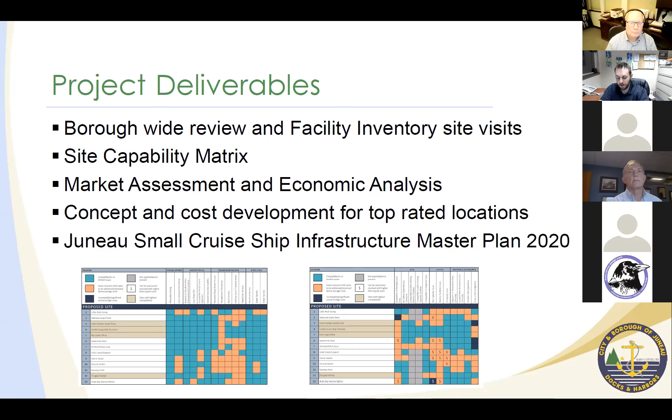Thanks, Eric, and nice to see everyone. Sorry I can't be there in person.

I'll start with a few notes about McDowell Group. Most of you are probably familiar with us. We've been around almost 50 years, and almost all that time have been tracking, analyzing, and measuring the economic impacts of the visitor industry in Alaska. We are based mostly in Juneau and Anchorage. I'm calling in from Bellingham, but I still will always consider myself a Juneau resident. I lived there about 12 years, so I was really excited to work on this project. It was a fun one.

As Eric mentioned, we conducted our analysis in the winter of 2019-20, before COVID was just a twinkle in our eye when we were wrapping this up. So I'll add a few post-COVID notes to this, but the report really reflects the pre-COVID environment.

The sources for our study, and some of them are on the call with me today, so thanks to all of you who helped me out. We talked to a lot of cruise line representatives. We maintain a cruise passenger traffic database for years, so we were in a really good position to tackle this project because we always track who's coming and going, what lines are coming and going, how their itineraries are changing, and how passengers are changing over time. Port of Juneau also gave us traffic data for their intermediate vessel float and input on traffic levels. And we also maintain a pretty good database of how passengers are spending their money and where, and cruise lines provided us some information on their spending in Juneau. So that was our methodology.

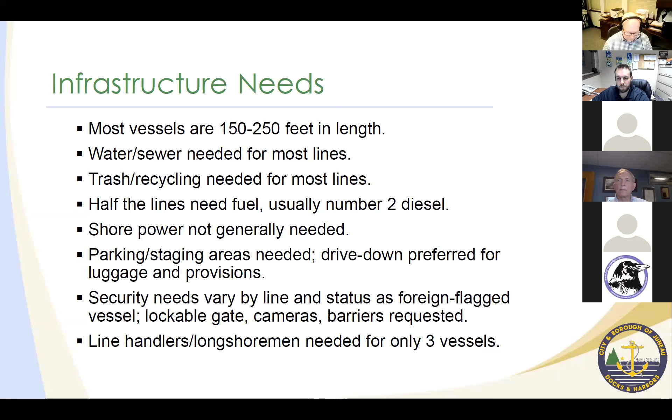We also asked CBJ their perspective on what was needed and where they were getting squeezed. They did an analysis of the IVF, the intermediate vessel float reservation data. In 2018, they noted 60 days at or over capacity. In 2019, 51 days at or over capacity, which is a big chunk of the summer. They noted that in July and August they turned vessels away 5 days a week, and in June and September, once or twice a week. That's a lot of vessels turning away—yachts, fishing vessels, all kinds of vessels—and it gets very congested down there. They recommended a 350-foot float with berths on both sides, so 700 feet of available moorage space. I know Dick is going to go more into that as we go forward.

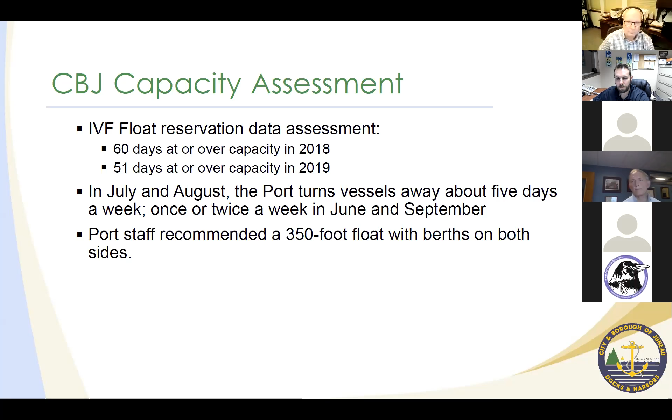So my final slide is about what do these lines bring Juneau? We estimated that they bring about $13 million between passengers, crew members, and cruise lines.

We were careful—we actually did some surveys out of the Juneau Airport a couple of years ago for Travel Juneau, where we caught cruise passengers exiting Juneau via the airport. We were able to ask them how long did you stay, how much did you spend, what did you spend on, all that sort of thing. We're always very careful not to double count spending. So if they said the cruise lines sometimes spend on hotel on the passengers' behalf, we always are careful not to double count those numbers.

You can see that those on turnaround, embarking or disembarking passengers, are spending a lot more—$575 per person on average, according to our survey research. Day passengers, we assume are spending about the same amount as the large cruise ship passengers, so about $160. We applied different rates depending on whether passengers were staying for the day, staying overnight, or embarking or disembarking. Crew members—we've done crew member surveys in the past—over the course of a summer they spend money on dining, transportation, shopping, and things like that.

The cruise lines also spend quite a bit of money locally. They purchase fuel, get their linens laundered, charter vans to get passengers to the airport, hotel rooms, dockage fees. Overall, passengers, crew, and cruise lines are estimated to spend about $13 million—at least in 2019, that was the figure we came up with. Just important to keep in mind, although small cruise passengers represent a fairly small, about 2% of the overall volume Juneau gets, they do spend extra time and extra dollars in our economy. That's it for me.

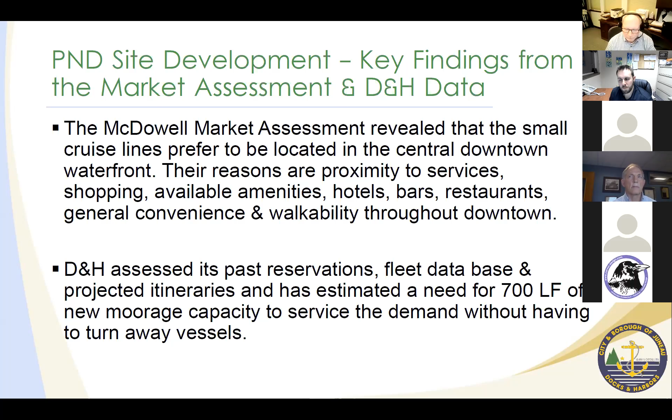So these are key findings, and I'll be referring to them as we move forward. So let's go on to the next slide.

Our team really assessed sites throughout the borough, and really these 6 sites kind of rose to the top for further, possible development within the community. Not all of them are located downtown, as Heather indicated. Auke Bay really wasn't in the running in terms of what the industry had desired, but we thought we would take a look at that. You will see some slides on that, but we also looked at the Little Rock dump.

We looked at Douglas Harbor. We looked at Harris Harbor. We worked with Norwegian Cruise Lines in their development of the subport a little bit, and we have a potential option for that as well. We won't be focusing too much on their project tonight because they have a presentation for the community next week, but we're going to take a look at that here as well.

But then lastly, we looked at the NOAA and the Seadrome site, and that has emerged as the Docks and Harbors preferred site for future development for this facility. So now I'd like to walk through on these next slides, really some of the concept plans that we've looked at for each of these sites. And the first one is Auke Bay.

This is a concept that was actually developed several years ago, 3 or 4 years ago, when GSA was trying to disperse the federal property after the NOAA facility was no longer needed, and those operations had long moved out to Lena Point. So both CBJ and the university received some property when that property was dispersed. As part of that process, each of those new landowners had to develop a plan that showed how they would put this into public use. So this Auke Bay Marine Station plan is what we're going to talk about here real briefly.

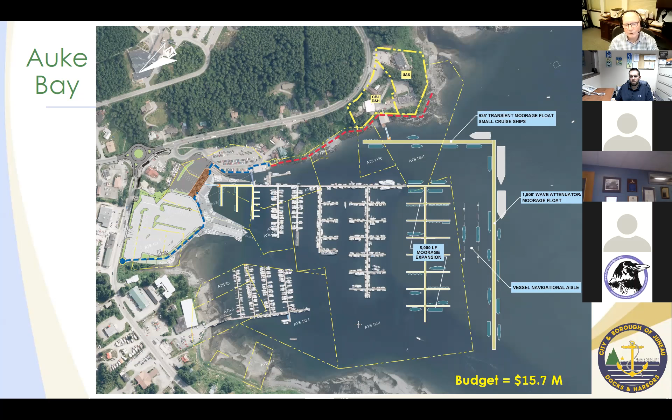Let's go on to the next one. This is where we looked at several downtown vicinity sites. This is just an overview of the downtown harbor area. We're going to look at 5 sites here.

The Little Rock dump towards the south is one site. Across the channel to the entrance of Douglas Harbor is another site we'll look at. And then far to the north, all the way under the bridge, is Harris Harbor. We've got a little project there.

And then coming in towards the subport, this is the NCL proposal here, a preliminary proposal at this stage. We'll be looking at options there. And then the preferred site is at the other end of the subport. The NOAA and the Seadrome site are right there. So that just gives you kind of a vicinity, along with what all the other cruise ship facilities look like in town. So let's move to the next site.

This is a concept that we developed for the Little Rock dump. The Little Rock dump itself has got quite a history. It was once a landfill. After that, it was a sludge disposal dump from the wastewater treatment plant. That's what all those areas look like, little golf courses, but they're actually sludge pits. That was capped many years ago, maybe 20 years ago, and closed out as a landfill. But the point being is that that whole Little Rock dump is pretty high in elevation, 55 to 60 feet above the water, which makes it very difficult to have the grades work out down to the water.

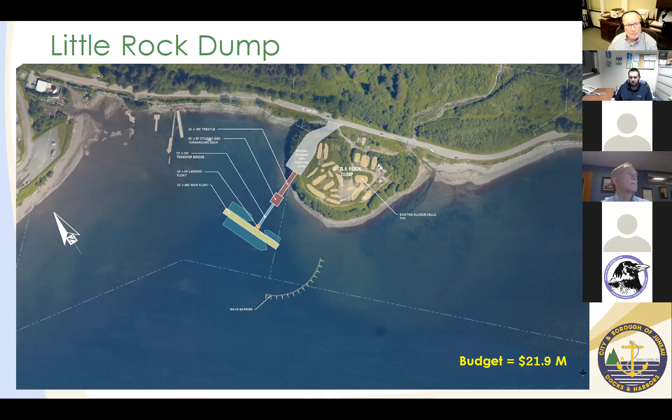Here's an option that we looked at at Douglas Harbor. Right at the entrance to the harbor, there's a floating wave attenuator that was installed by the Corps of Engineers a number of years ago, along with a couple of rubble mound breakwaters that protect the entrance to the harbor. This concept would look at extending that float to the north with a new float, roughly 20 feet by 250 feet. The existing wave attenuator is 230 feet, so you have an overall length of about 480 feet on the outer berth, and there's enough room on the inside to get another 100-foot vessel on the north inside berth.

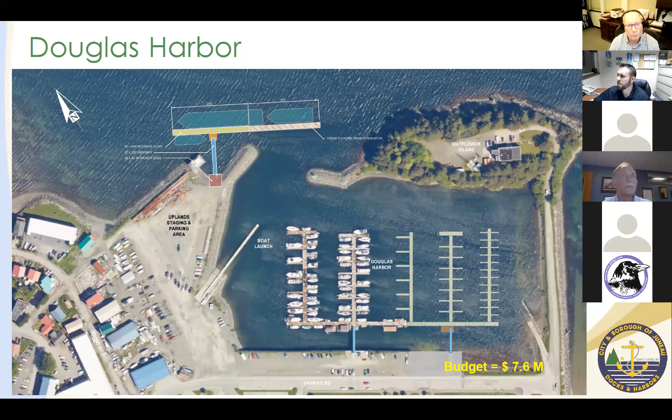So it doesn't quite get to 700 feet, but the facility would be just a small pile-supported pad or deck at the edge of the fill there, leading again to a drivable gangway down onto the float. One of the problems with this is it's a heavily utilized area for launching boats and whatnot, with trailer parking, so this would cut into the uplands development for any sort of upland expansion. But this is a lower cost option, budgeted at 7.6 million total project cost. So let's move to the next one.

Harris Harbor. You can see the bridge, and just inside the entrance to the harbor, there's a roadway that runs under the bridge there. It's a very narrow traveled way. We looked at what we could do to increase the uplands in this vicinity, and also increase moorage capacity.

This is showing a sheet pile bulkhead, roughly 565 feet long right in there. That would be filled and create about an acre of new uplands. It's roughly 60-foot average width off the existing roadway, about 40 feet on one end and 80 on the other.

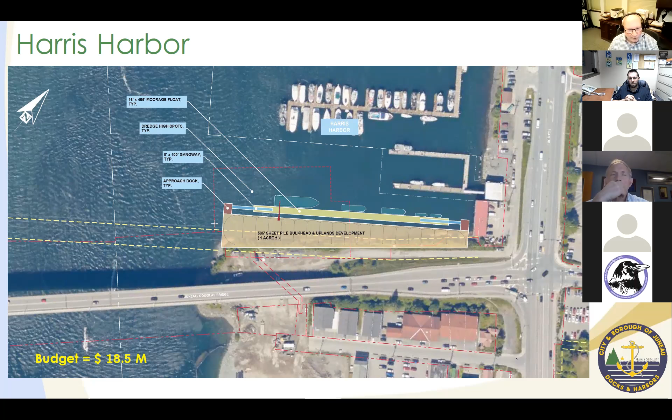In front of that, we'd have to dredge the basin to get water depths deep enough for these vessels, so there's a dredging component to this. At both ends of the bulkhead, there'd be a pile-supported platform with a gangway leading onto a new moorage float. That float is only 465 feet in length, but it has quite a bit of capacity.

This has some genuine interest with Docks and Harbors. But there's a fatal flaw with this concept in that the larger ships can't get under the bridge. A few in the smaller class could use this, but it won't service the bulk of this fleet getting in and out. So it has potential, but only for the smaller vessels, and it's budgeted at 18.5 million estimated for this concept.

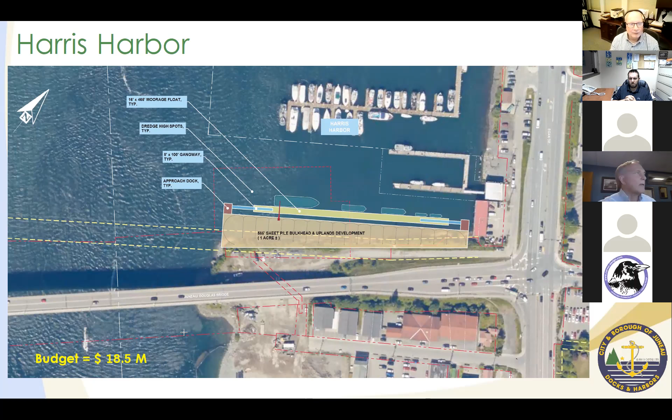Let's move on to the next concept. This is the Norwegian Cruise Lines and U.S. Coast Guard subport plan. This is very preliminary in nature, obviously.

As I mentioned, NCL is working with MRV and PND as part of that team. Captain Ed Page and a bunch of other consultants are helping NCL develop their subport property. They'll be in front of the public again next week to talk about this.

I was asked by Docks and Harbors to look at this, just to see if there's any possibility we could service the small cruise ship fleet at what's being proposed here by NCL. I'm only going to speak to the offshore portion of this overall plan: a new pier would be extended basically in line with Whittier Street, straight offshore.

There'd be a pile-supported deck right in there that leads to a drive-down transfer bridge landing onto a central pontoon, not unlike the 16B berths. This would be a floating berth as well, and offshore from that are mooring dolphins.

NCL only proposes to use one side of this berth for their ships, leaving the other side for other operations, because this berth would interrupt the Coast Guard operations. You can see remnants of the Coast Guard deck off to the left, basically at the bow of the NCL ship there. So this would interrupt Coast Guard vessel operations, and NCL has agreed to have Coast Guard vessels raft up on the inside berth of the floating pontoon.

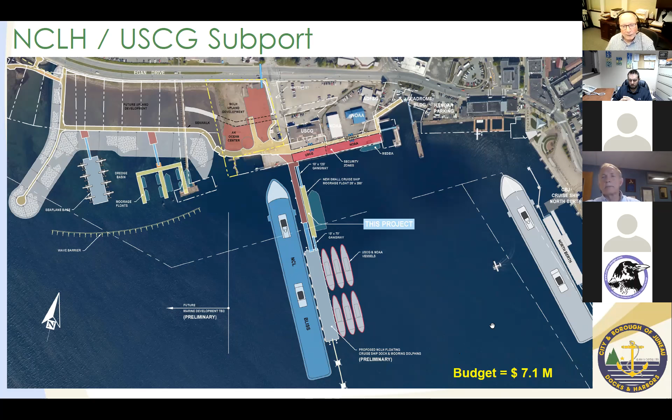Let's move on to the next idea. This is what has emerged as the preferred plan thus far. We're calling it the NOAA Seadrome concept.

If you consider what I just discussed for the NCL facility and left that plan in place, this facility moves a little to the east and is focused on NOAA property, Goldbelt property, and CBJ property. So it would be an endeavor requiring quite a bit of cooperation and coordination between all those entities to work.

In essence, what it does is expand the uplands — you can see it in the enlarged parking area. I'll show another view of that shortly, but basically it advances both fill and a pile-supported deck offshore. By doing that, you'd have to slide the existing Seadrome float seaward as well, connecting into a new deck right there — that's the existing gangway and float.

And then to the west of that would be the new small cruise ship float. This is a 32 by 350 foot float, accessed by a drivable transfer bridge off the deck, so vehicles could come through the parking area, drive right on down, turn around, and come back up. There's also an option here for NOAA, which occasionally comes in and would like a floating berth. Through scheduling with docks and harbors, they'd be served there as well. When they needed heavy load operations off their upland facility, they'd move to the pile supported deck and load from there—you can see some ship maneuvers up off that float.

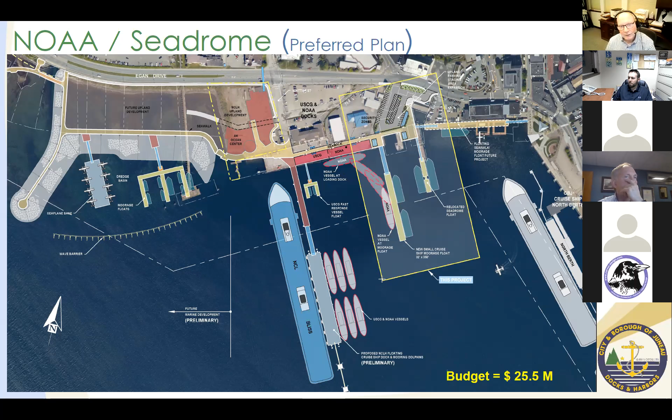If we could move to the next slide, we're going to toggle back and forth a little bit. This is what the existing conditions look like right now. There's a variety of different parcels held by different property owners, and there would be a lot of coordination that would have to happen for this to work. We've been in discussions with NOAA and Goldbelt, and both are looking favorably at this as a possibility, but quite a bit of work would need to happen before that could take place.

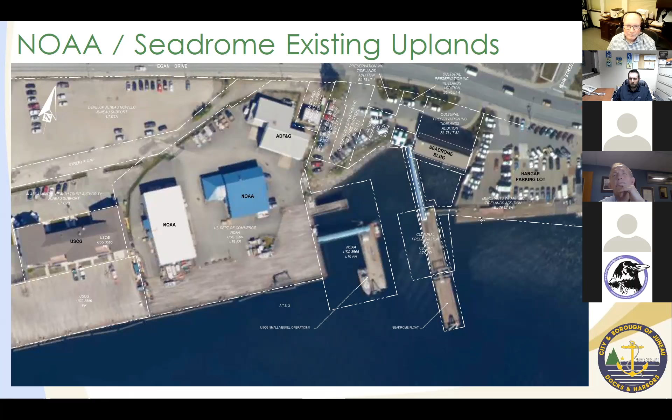So if we go to the next slide, this is the uplands developed. Let's toggle back real quick—here's existing, and now moving forward, here's what's proposed. You can basically see a fairly significant uplands expansion. It would not be unlike what's occurred over the past year or so for the deck-over project next to the parking lot, where fill was placed behind a retaining wall and then there was some seaward pile supported deck. This would be somewhat similar in nature to that.

You'd end up with 39 passenger vehicle parking stalls in the uplands, and 8 bus parking stalls with a canopy for patrons getting off the buses and whatnot. At the top of both gangways would be covered shelters for people getting out of the weather. There's also a space near a revised entryway where larger coaches in front of the Seadrome could come in and park, along with a covered shelter there. So there's a lot of upland circulation improvements here, both for pedestrians and for vehicles.

And then in this slide, you can also see where the small cruise ship moorage float is extended right there.

So this project had a budget of $25.5 million overall. But it has a lot of community opportunity here, with the Seawalk being able to extend in both directions—back towards the subport and in front of NOAA and Coast Guard, as well as towards town. In the future, there could be some gangway access to a floating Seawalk fronting the hangar, if those operations desire that. That would be something a ways in the future. There are seaplanes and vessels that operate out of there, but it does open up the idea of doing something larger for the community with a connected Seawalk, if that were the case.

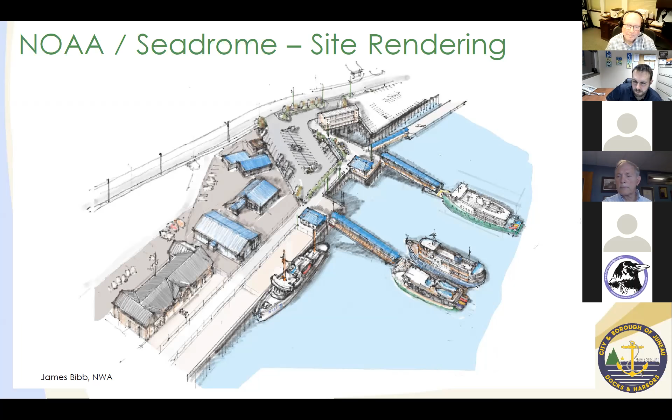So the advantages of this facility: it provides 700 feet of lineal moorage, plenty of uplands for parking, staging, and pedestrian circulation, and has the flexibility for extensive Seawalk extensions. It meets the cruise line's objectives for a central downtown location, and it has some preliminary support from the adjacent property owners at NOAA and Goldbelt. As I mentioned, it will take quite a bit of work to move forward, but it does have some preliminary support.

So what I'd like to do now, as we move to the next slide, is pass this on to Captain Ed Page, and he'll talk about some of the navigational issues.

I'm the executive director for the Marine Exchange of Alaska. I'm involved in several port projects over the years. My maritime career extends about 50 years, a little bit more than I actually hate to admit it. I first entered the Coast Guard in '68.

Had the good fortune of bringing a Coast Guard ship from Boston up to Juneau in 1973, so a very different looking port in '73. During my 30-year Coast Guard career, I served a variety of marine safety assignments and was involved in port development projects and assessing the maritime challenges of modifying ports. And my last 20 years with the Marine Exchange, I've been building systems that help facilitate transportation of vessels to and from ports by providing current sensors, tidal current sensors, like we've done at the Port of Juneau, weather sensors, and then a vessel tracking system using automatic identification system.

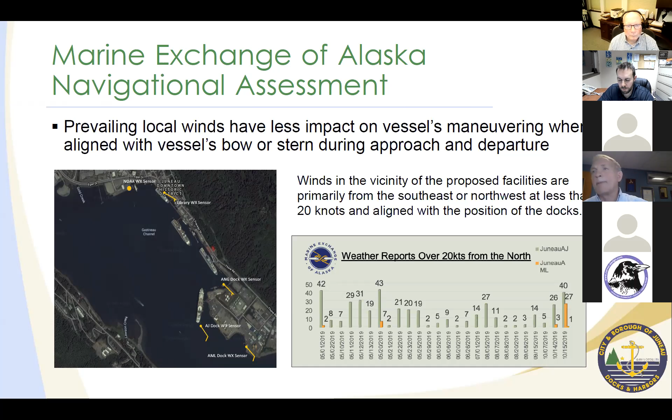The next slide will give you a little more feel for what else we looked at. We looked also historically - the vessels are required, if they're over 65 feet, to have an automatic identification system. They transmit every couple of seconds their course, speed, and direction. And we have AIS receivers throughout Alaska, but in particular, we have one right here in Juneau. We've used this extensively when we did the cruise ship, large cruise ship dock 16B years ago. We did the same kind of analysis, looking historically at how vessels transit.

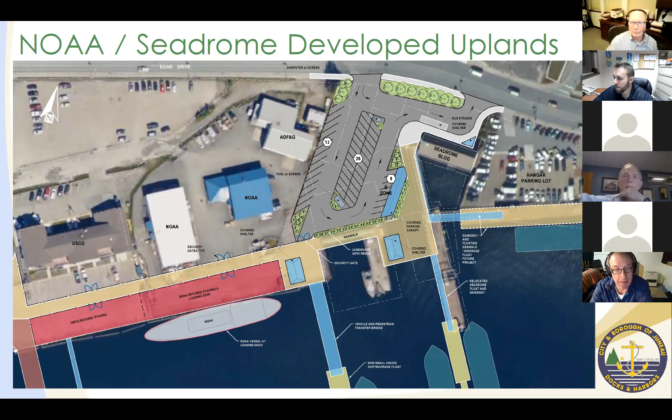So the first question we are asking you is, what are your concerns that we need to be aware of for the upland facilities? When we're saying the upland facilities, it's the Seawalk, shelters, parking, and landscaping. So what are your concerns with this plan?

Again, if anyone wants to jump in, they can unmute themselves or enter their input through the chat box. Hey Chris, it looks like Carla Hart has her hand up. Hello Carla, go ahead. Hi, thanks. Hey, I don't see where you all are taking into consideration operational concerns and community concerns beyond actual physical infrastructure. Would you like to expand on that a little bit more, Carla?

Yeah, right now, as you know, some people in the community feel that we've reached a capacity for cruise tourism. And I see this being segmented out between the large cruise ships, the intermediate cruise ships, and the small cruise ships. However, to some sense, a passenger is a passenger, a bus is a bus, and a helicopter over my house is a helicopter. So I'm wondering how you're working on cumulative impacts with respect to this, and how you're dealing with increased bus traffic out of a very congested area onto the street, right turn only, which puts more traffic through downtown. Left turn is going to be a problem.

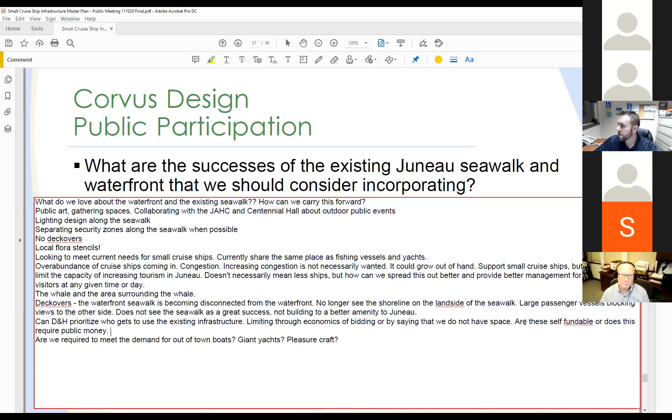Yeah, I'll start by saying that we serve the public. We serve the public whether they're commercial fishing boats, pleasure yachts, locals in a recreational boat, or small cruise ships. We serve everybody. So we could limit, but that's not what we are as a public entity. We try to provide opportunities for everyone to be successful.

As far as funding goes, and I'll talk about this when we tie things up, there is no funding for this project. This is a plan. We're seeking input from the public to develop the best project forward. We have lots of projects over the years; Docks and Harbors, we pride ourselves on building things. We also plan when we're not building. So this is just that planning effort, to tease out what's good about developing the waterfront, the challenges, and how we can meet everyone's expectations, especially the private citizens of Juneau. So it's very important for us to hear these things and move forward.

But as a general rule, Docks and Harbors, we don't pick winners and losers. We look at the market demands and try to provide opportunities for everyone to use the waterfront, whether you're a vessel owner or a pedestrian along the Seawalk. We plan, we listen, and we execute to the best of our ability.

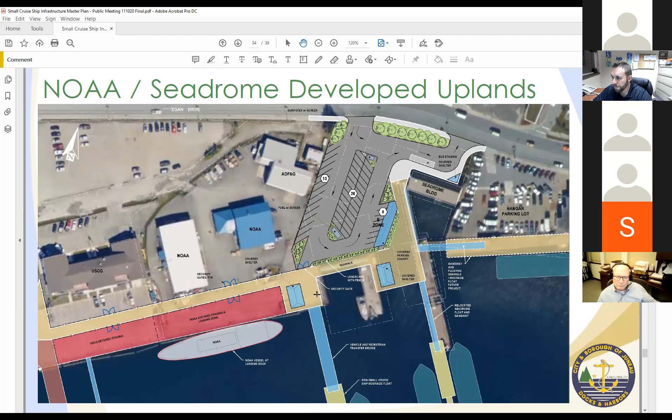Better connectivity with the Seawalk. Make the dock space at water level accessible to the public during winter. 16B is blocked off and not community friendly. Okay, good comment. Provide parking in the off season.